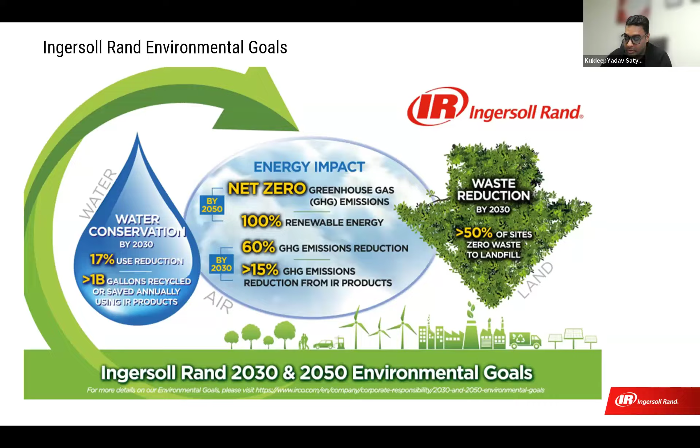The next slide is about our technology leadership, wherein we have marketed different kinds of equipment: compressors, blowers, vacuum pumps and systems, and single-use technology. We have a strong market position in technology innovation, global expertise, and a broad portfolio of products. We have a huge amount of equipment, with active patents around 88% with sustainability benefits, more than 2,300 engineers, and expertise in hardware, software, and controls. This is about our product portfolio and technology leadership.

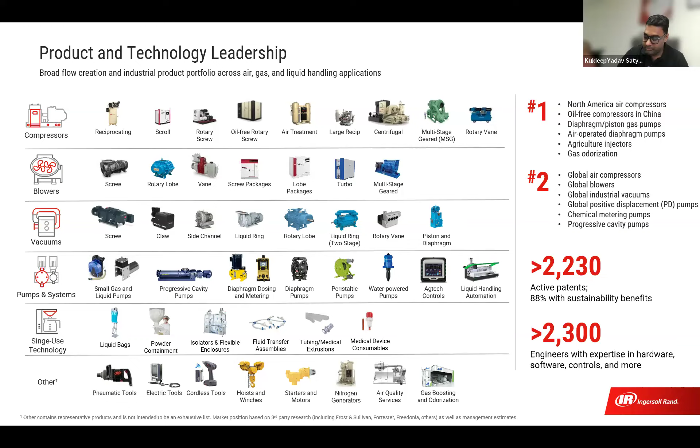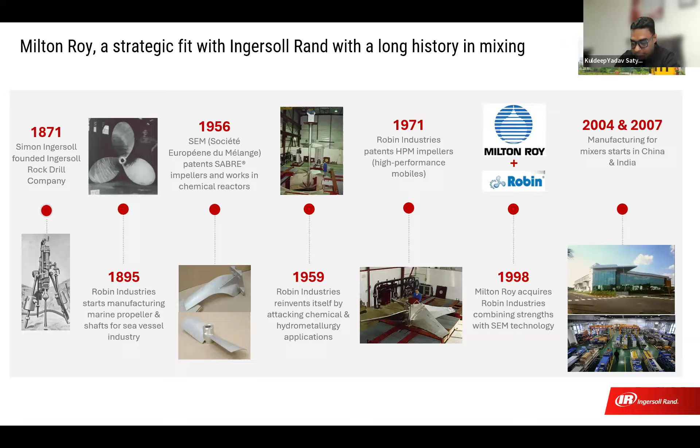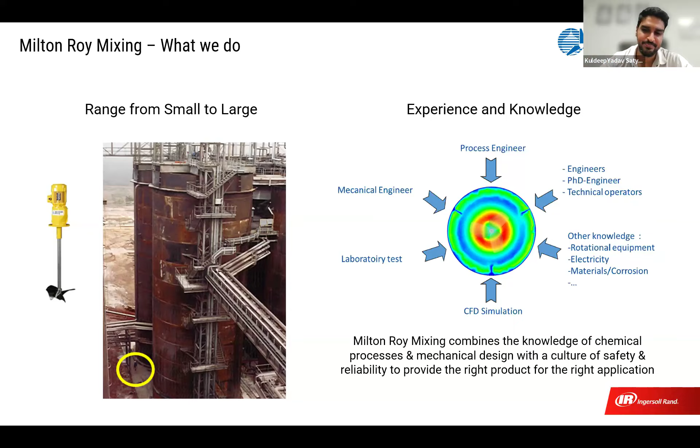So now we'll start about mixer - what is mixer, why mixing is required, what are the different types of mixers, where all it has to be used.

So this is what mixing is. This slide covers the basic definition of mixing. If you want to define it: mixing is a process to reduce the inhomogeneity in a process. Suppose a process is there, if you expect any inhomogeneity, it could be either temperature difference, density difference, or phase difference. So if you want to reduce inhomogeneity, you need mixing so that the process or the solution becomes homogeneous, or whatever fluids are inside the tank, it becomes homogeneous. So that is how we define mixing - it is defined as reduction of inhomogeneity to achieve the desired process result.

And inhomogeneity, as I explained, could be of different types - either density difference, temperature difference, or phase difference. This is what mixing is. And some of the examples of mixing are shown here.

Suppose you are mixing water with sugar syrup. Once you mix it, because of the density difference, sugar syrup will be settled at the bottom and water will be at the top, as you can see in image 3. Once you mix it, suppose with a spoon, it will become a homogeneous solution - sugar syrup will be blended in water. So this is an example of blending. Blending is when we are mixing two liquids that will not mix on their own due to density difference or some other difference.

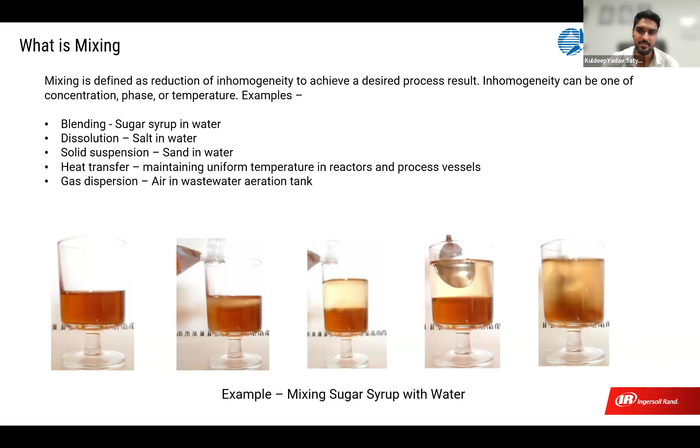So now we understood what mixing is. It's the process of reducing inhomogeneity, which could be of different things. So what is the purpose? Why do we mix? Why do we want to reduce inhomogeneity? This slide represents that with examples.

Suppose we want to mix ethanol with gasoline, like nowadays we get petrol mixed with ethanol. Due to density difference, it will not mix automatically. If you put those two liquids inside a tank, they will not mix on their own. So mixing will be required.

For solid suspension, as I said, suppose you have iron ore and want to pump it from one tank to another. If you don't mix it, the iron ore will settle at the tank bottom and water at the top, so you won't be able to pump it. In that case, you need to mix it.

So that is coming under solid suspension. It's not mixing, but the particles getting suspended, as shown in the last image at the bottom. Then there's dissolution, where solid particles mix inside the fluid to make a solution. For example, mixing sugar with water, or an industrial example like mixing polyelectrolyte powder with water, used in wastewater treatment. A solution is prepared and it remains a solution - it's not like if you stop mixing, the phases separate. Once the solution is prepared, it stays a solution. So that's dissolution.

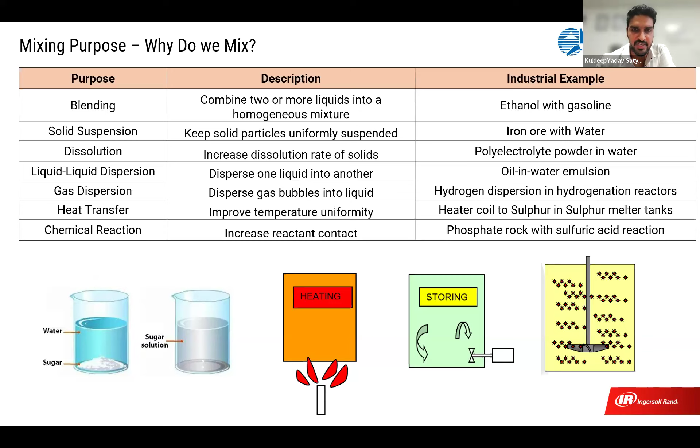So for this slide, suppose now you understand what mixing is and whether mixing is required for your process or not, you can figure that out. Next, suppose you want a mixer and approach an OEM like Milton Roy Mixing - what data is required for selecting the right mixer? That's covered in this slide.

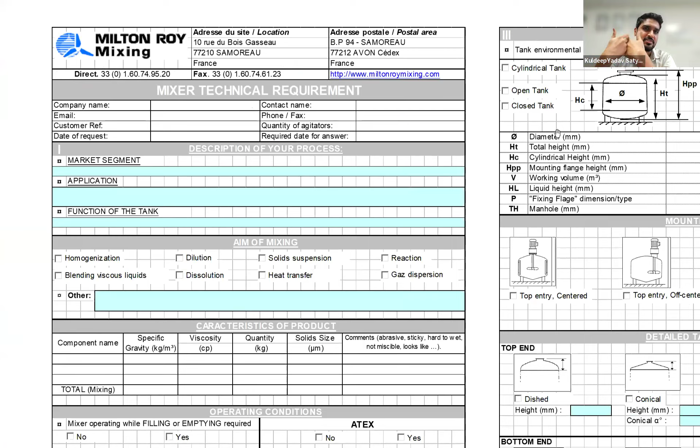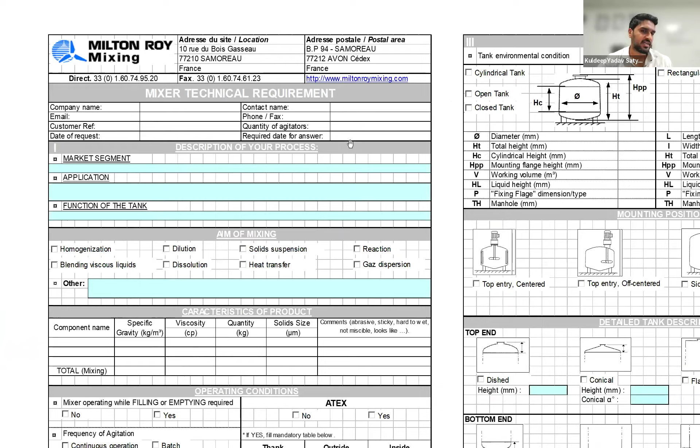We have this data collection sheet, which we send to the customer and ask them to fill it out. Based on that, we're able to select the right mixer. Let's quickly go through what's required for selecting the right mixer. First is application - which market it's going to, the function - whether it's blending, solid suspension, chemical reaction, or heat. Then we mention the aim of mixing - why you're looking for a mixer.

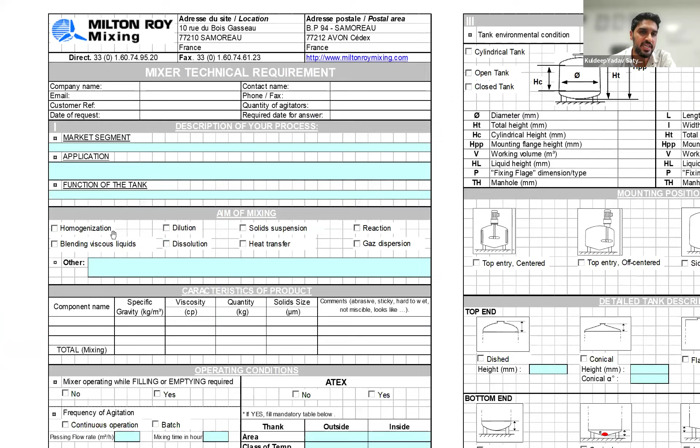And then we need the characteristic of the product. So suppose it could be only one product, like you have only one thing, but heating is taking place, so in that case it is one product.

Sometimes it could be two or three, like you are mixing phosphate rock, water, and sulfuric acid to make phosphoric acid. In this case you have to mention all the components inside the tank, and give the specific gravity, viscosity, and if it is solid particles, what is the size, and at what weight concentration you are mixing the different components. So that you have to mention here.

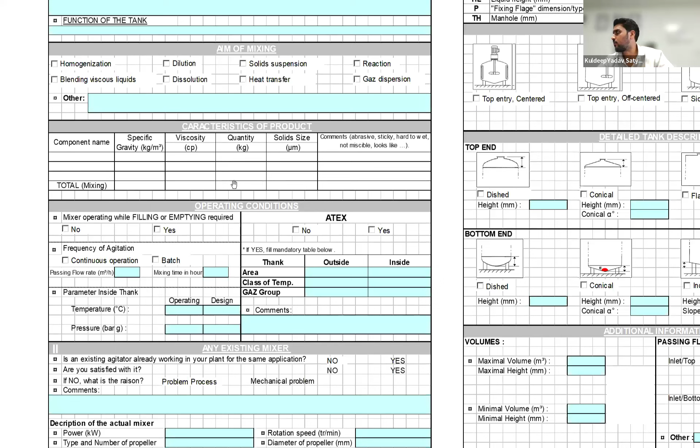And then whether you want to use the mixer while emptying and filling the tank, that is also important, because it impacts the mechanical design of the mixer. Also whether there's any hazardous area, the frequency, voltage available at site, and the temperature and pressure, if you have anything.

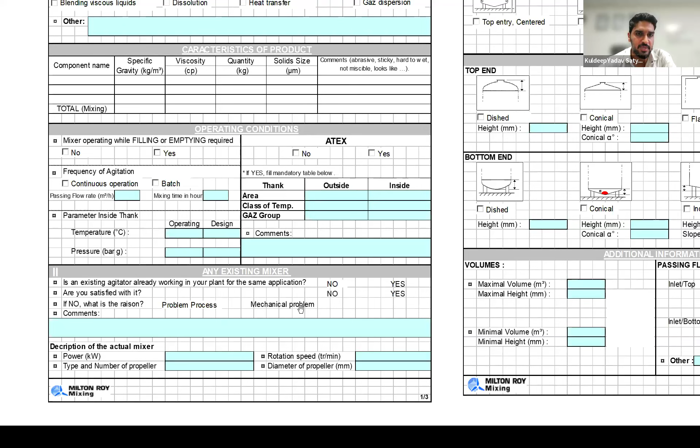And if you are using any existing mixer, you can mention here. If you are facing any problem with the existing mixer, that you can mention here.

Actually, this is the tank details. So what kind of tank, whether it is a cylindrical tank or a rectangular tank, that can be mentioned here. And what kind of mixer you are looking for. Mixers could be different types, like top entry, side entry, bottom entry with bottom bearing.

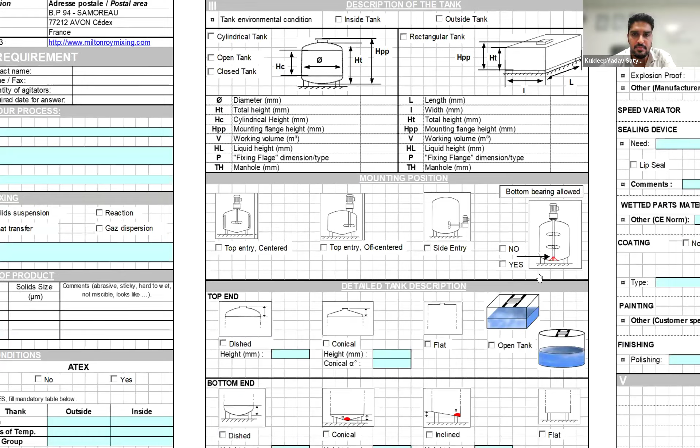These things I'll explain in coming slides. So what is the tank geometry, like what is the top end and bottom end of the tank? So we have asked for the details here.

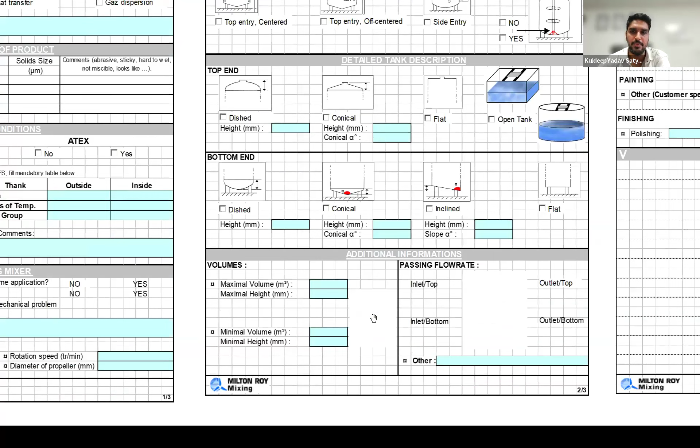And what is the maximum liquid level, minimum liquid level inside the tank? Where is the outlet and inlet position? So those things.

What kind of motor do you need? What efficiency, what voltage, what frequency, whether an explosion proof motor is required or not, that has to be filled here. Is it like a DOL start motor or a VFD motor? So that you have to mention here.

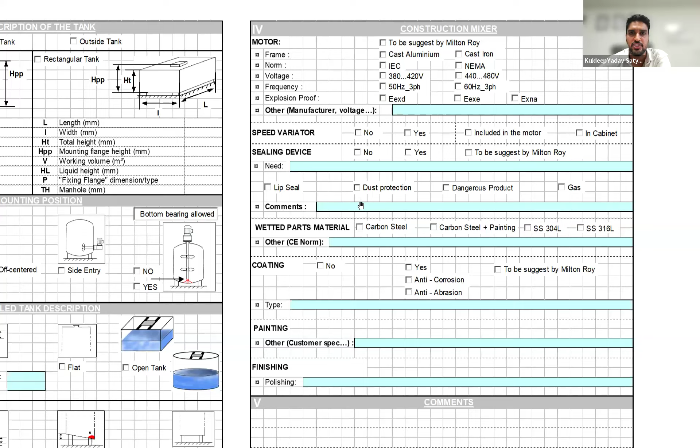So if you need any kind of sealing, that has to be mentioned here. It could be either lip seal or hydraulic seal or mechanical seal or any kind of seal.

What is the MOC you prefer for the wet end part, especially for the shaft and impeller? What is the MOC you are preferring? What about painting? Do you need any painting? If yes, what category? And finishing, like if there is any polishing requirement of the wet end components.

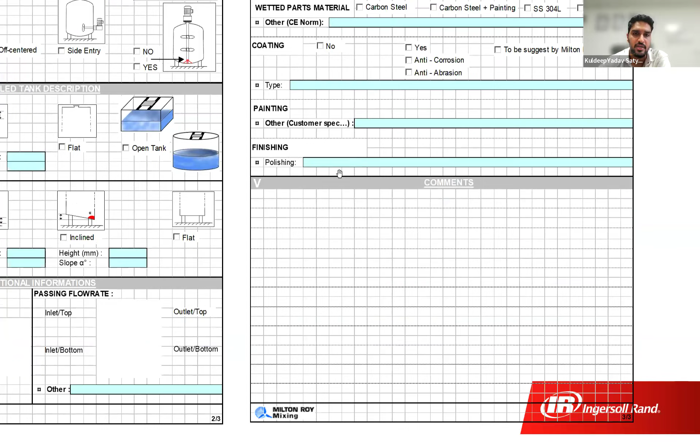So those details will be needed for selecting the right mixer. These are the details required so that we can offer you the right mixer for your application. And this is what we send to our customer to collect the details for selection of the proper mixer.

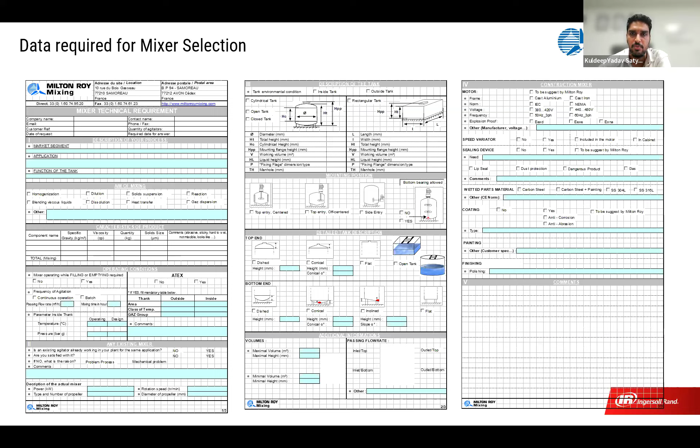Now we'll move to the different types of mixers we have. Type of mixers isn't just like, okay, these are the 3 types or these are the 4 types. Type of mixers can be defined based on different criteria.

One of the criteria is what kind of flow the mixer is generating, that could be one. How the mixer is fixed to the tank is another criteria. What kind of impellers we are using is another criteria. So here I have covered axial and radial flow mixers.

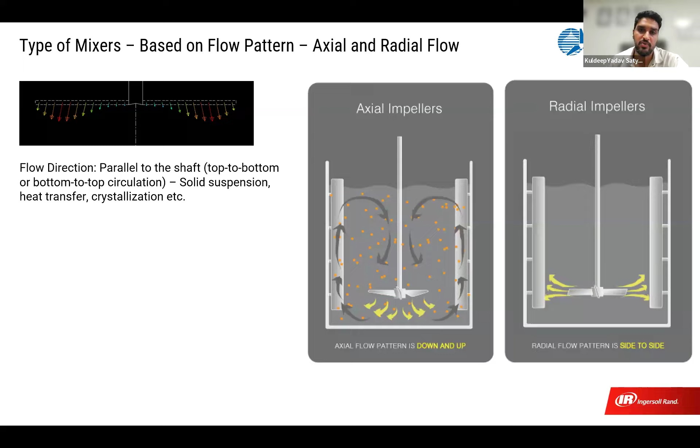For heat transfer, suppose you have a heating coil at the bottom of the tank, and you want to make sure the temperature of the slurry inside the tank is constant. In that case, axial flow impeller will be used. And for crystallization, where crystals have to be developed, axial flow impellers have to be used.

Then we have radial flow impeller. In that case, the flow is generated perpendicular to the shaft, and it comes out radially from the impeller, side to side. If you zoom out at the impeller, this will be the flow direction—radially outward from the impeller and perpendicular to the shaft.

It's used for emulsification—like mixing oil with water, where you have to shear the oil or water particles to make them small enough to remain suspended and form a solution. For gas dispersion, you have a gas disperser at the bottom of the impeller, and you want to break the gas particles into smaller particles so the contact area increases and the reaction being served by introducing the gas is achieved. So for high shear mixing applications like emulsification and gas dispersion, we use radial impellers.

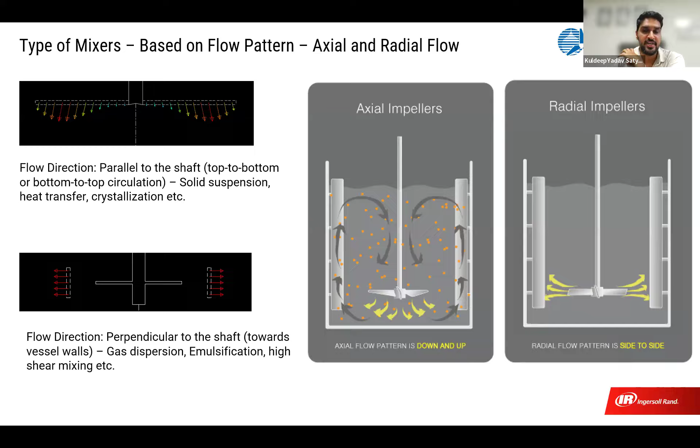So here we covered the type of impeller based on the flow pattern generated by the mixers. Now we cover the type of mixers based on the mixer mounting.

First is top entry mixer, which is mounted from the top of the tank, hence the name top entry mixer. Here we have shown an example of a top entry mixer used in coagulation application in wastewater treatment.

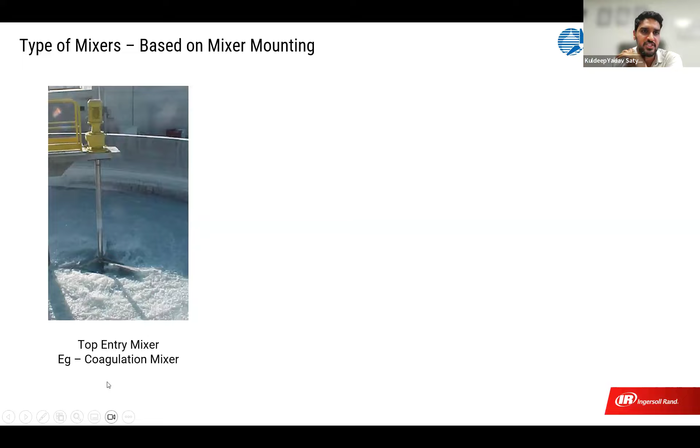Next is side entry mixer, mounted on the side of the tank. This is the tank, this is the circumference, the diameter of the tank, and it's mounted at the side—that's why it's called side entry mixer. This is one of our mixers installed in a crude oil storage tank application.

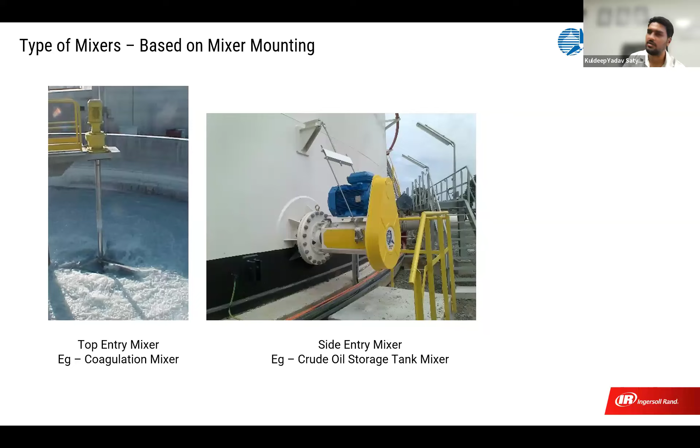It could also be a bottom entry mixer, introduced from the bottom of the tank. The tank will be coming here, this part will be mounted onto the tank nozzle, and the impeller will be inside the tank. Since it's introduced from the bottom, it's called bottom entry mixer. This is one of our mixers given for a PVC reactor tank.

So these are the different types of mixers based on mounting, as we classify them.

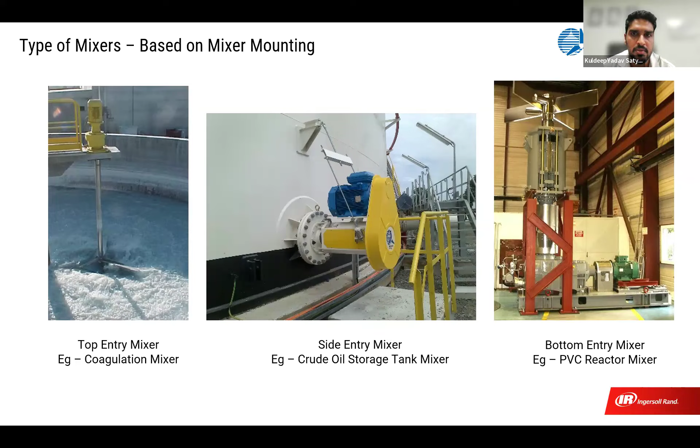Now we come to what are the mixer components—what will be the main components of the mixer? In this image we show the main components. These components have to be there for a mechanical mixer. Maybe not the gearbox—there could be a mixer without a gearbox, rotating at high speed based on the motor speed—but otherwise these components will be there for any mixer.

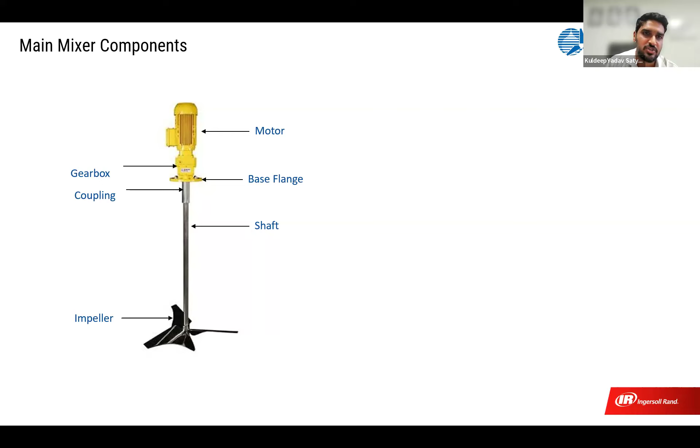We'll have a motor that converts electrical energy into mechanical energy and rotates the gearbox. Here we have the gearbox, which is required to achieve the required torque and output speed required for the mixer.

Then we have a base flange, provided matching your tank nozzle dimension, or if it's mounting on a structure, matching that structure's dimensions, to mount it on top of your tank. We give this base flange.

Then we'll have a coupling—it could be of different types—whose purpose is to connect the agitator shaft to the gearbox shaft. Then there will be the mixer shaft, and then the impeller. The impeller we call the heart of the mixer—it is what does all the mixing operation, converting mechanical energy into hydraulic energy required for the process.

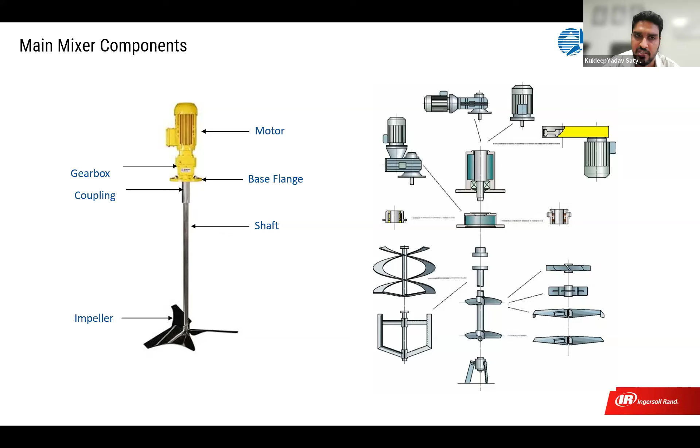So the agitator could be supported from the bottom or suspended type. Supported type will be required when the shaft length is very long, and we don't want all the radial load and bending load coming directly to the gearbox. In that case, we give support at the bottom also, which reduces the load acting onto the gearbox, plus it reduces the shaft size of the agitator - so we could go for a smaller size if we give support at the bottom. We give bottom support based on the dimensions of the shaft and the loads acting on the agitator.

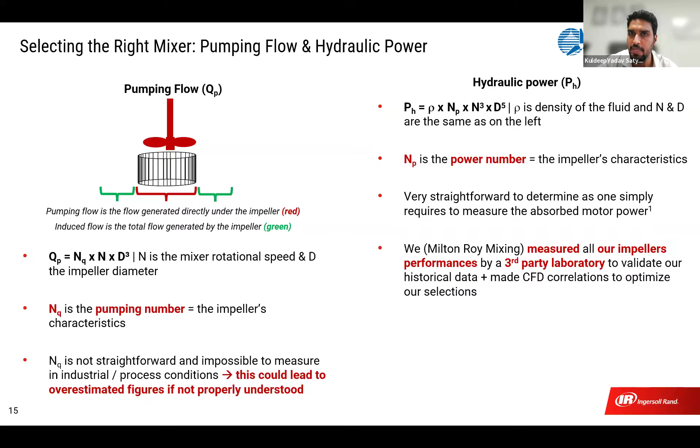So this is the formula used for hydraulic power calculation. So as you see here, rho is the density of the slurry, and NP is the power number. So for each impeller, it will have two dimensionless numbers, power number and flow number. That is defined by the geometry of the impeller. Based on experiments we have to do at our lab, we will come to know what is the power number and flow number of an impeller.

Then speed cube and diameter power 5. So this is the formula used for calculating the hydraulic power.

As I said, it's not very easy to calculate the power number and flow number of impellers. So for that, we work with different third-party laboratories, and we create miniature models of our impellers, and then we do experiments and calculate what is the right power number and flow number for a particular impeller. Plus, we do CFD analysis also. From there, we'll get to know what is the power number and flow number of an impeller.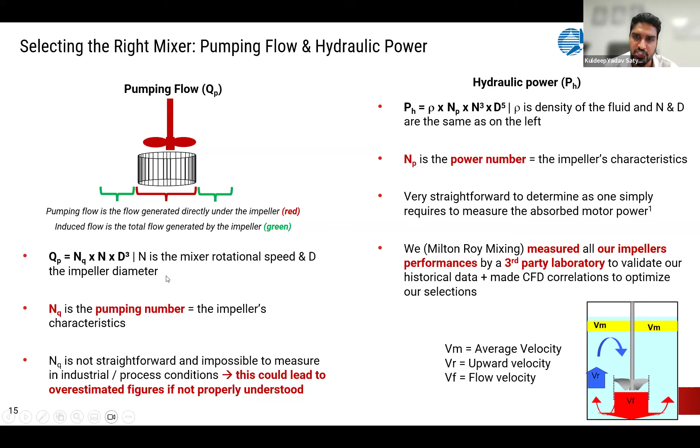So for selecting the right mixer, we need to decide three things only, for defining the hydraulic parameters of the mixers. So first thing is type of impeller, what kind of impeller we have to use. At Milton Roy Mixing, we have 40 plus impellers, different types. So we have to select the right mixer.

So once that is done, the power number and flow number will be defined, it will be fixed for that particular impeller. Then we have to select the impeller diameter and rotational speed. So once these three things are selected, we'll get the hydraulic performance of the mixer, like what will be the flow the mixer will be generated, what will be the velocity the mixer will be generated. So those kind of details we will get once we select these three parameters.

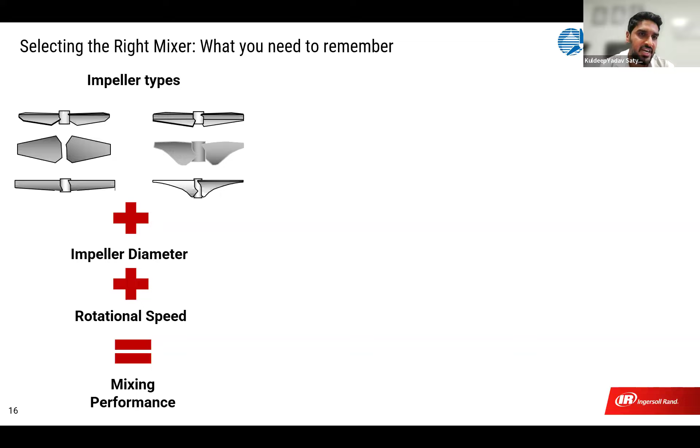So once we select these things, the impeller type, impeller diameter, and rotational speed, we can calculate the pumping flow and absorbed power of the mixer, and we can complete the hydraulic and mechanical design once we select these three parameters.

And here what we are emphasizing is, not always what customers generally think is like if the power is more of a particular mixer, the performance will be better, but that's not always the case. So the flow has to be correct for the performance to be better, and power varies based on the type of impeller, what diameter and speed we have selected. So not necessarily more power means the better mixer.

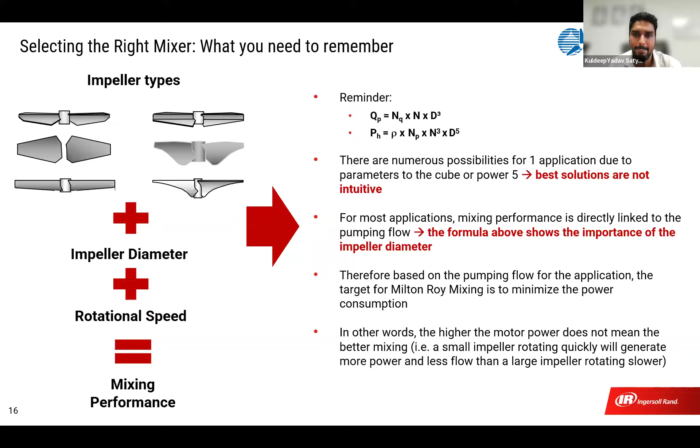The flow has to be calculated actually and compared whether the flow is enough or not, not related to the power. If flow is better, maybe the mixing will be better, but not like if power is better, the mixing will be better. That's not the case.

So here we have a very nice video to show different levels of mixing. Once we calculate the mixing velocity inside the tank, then we can calculate what's the level of mixing. So in this video, you will see at different mixing levels how the mixing will be looking inside the tank. This is just a video we have generated by experiments we have done in our lab. So I'll just play this video.

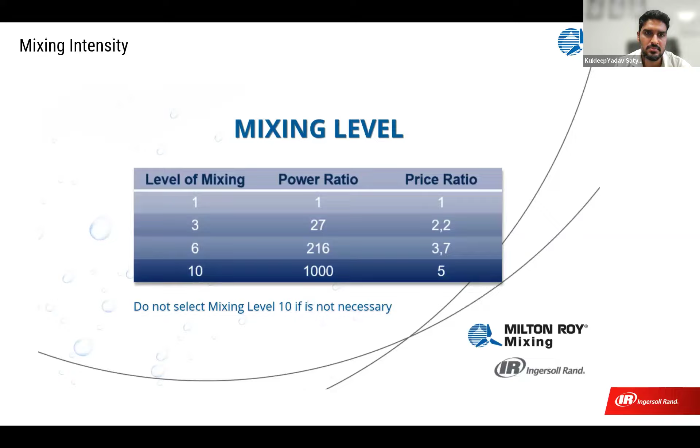Yeah, so just for this presentation, what I wanted to show is just a minute.

So here you have seen at different mixing intensity or mixing level, how the mixing will look inside the tank - a visual representation at different mixing intensities. So if you go from level 1 to level 10 of mixing, the power increases from 1 to 1000. So the level of mixing has increased by 10 times.

Yeah. So... just... yeah, so sorry.

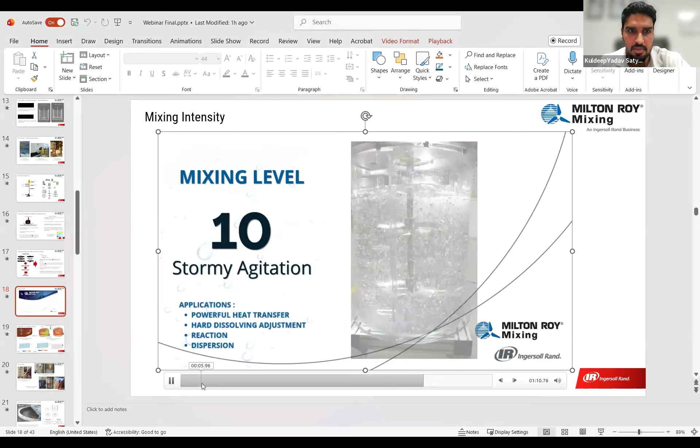So if you see here, the level of mixing has increased by 10 times, but the power has increased by 1000 times. So if your process doesn't require that intense mixing, you don't have to go for higher level or higher flow or higher power of mixer. We have to select the optimum mixing level that is required, and based on that, we can reduce the power, which helps in reducing the operating expenses.

And the price also, if you go from level 1 to level 10, the price increases by 5 times. So that's all - we have to select the right mixing level that is required. If we keep on increasing the mixing, maybe it's not required for the process, but you have to pay for the operating expenses and high cost of the mixer.

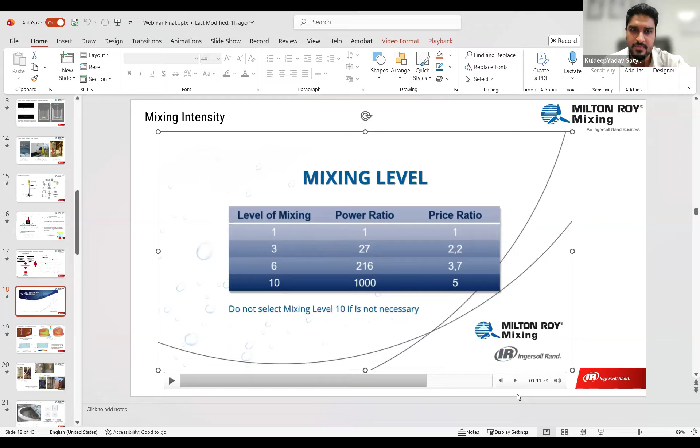Yeah, so here for this slide, we'll be explaining the importance of CFD for mixer selection and what we do for our customer when it comes to CFD.

So without CFD we can do analytical calculations, like what flow is generated, what velocity is generated inside the tank, what power is required. But to validate the analytical calculations, we do CFD also for our customers. And for complex applications, it is better to do CFD because based on different complex tank geometry, it's not possible to calculate analytically alone - like what will be the dead zones, what percentage of dead zones inside the tank. So for that, we do CFD analysis, and it is very helpful in that kind of application.

This is the CFD we have done for a sulfur melter tank with a top entry mixer. Here you see we can get the velocity contours inside the tank, so we come to know what is the velocity at different areas inside the tank and whether there are any dead zones or not. Dead zones are where the mixing is not adequate or the velocity is very low - we call that a dead zone.

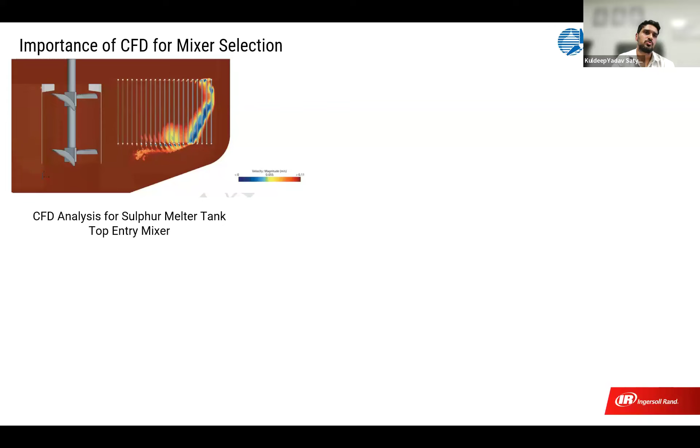In this application there was a heating coil that melts the solid sulfur to liquid sulfur. Based on the velocity, we come to know where the velocity is less, and where the velocity is less, the heat transfer will not be proper. So this kind of analysis we can do through CFD.

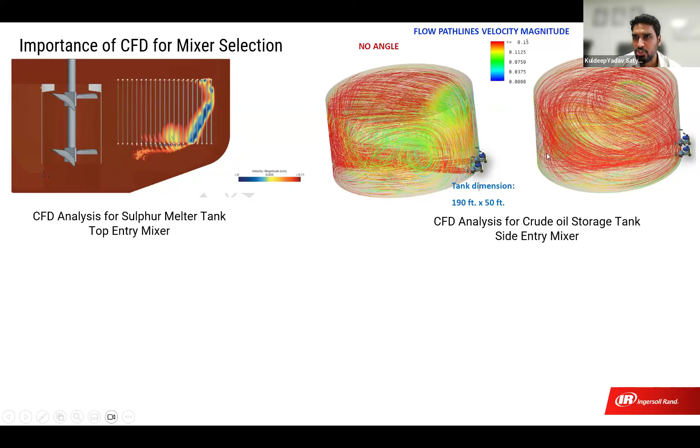So here you see the velocity streamlines. On the right side you see more red lines - the velocity in that case is more than 0.15 meter per second. And when mounted at 0-degree, you see more of the green area, so the velocity is between maybe 0.03 to 0.1 meter per second wherever you see green and yellowish area. So this kind of test - what is the best mounting position - we can also do through CFD analysis.

And then we have a very interesting analysis we have done here. This was a tank for a wastewater treatment application. The customer was asking, based on the tank geometry, for 3 mixers. But through CFD analysis, we showed the customer that 2 mixers give better performance compared to 3 mixers. That helped in reducing the capital expenditure, because they only had to buy 2 mixers instead of 3, plus reducing operating expenses, because they only pay power for 2 mixers and not 3, since we kept the power the same and only reduced the number of mixers.

I'll just play this video - it's a small animation.

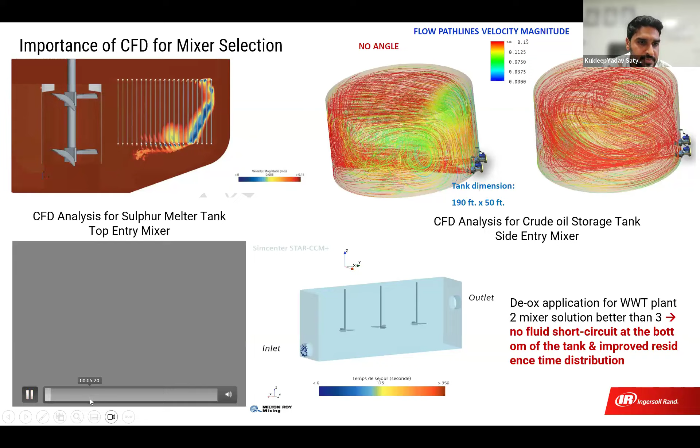Oh, it's not visible. Okay, maybe I'll come out of the slideshow and present this.

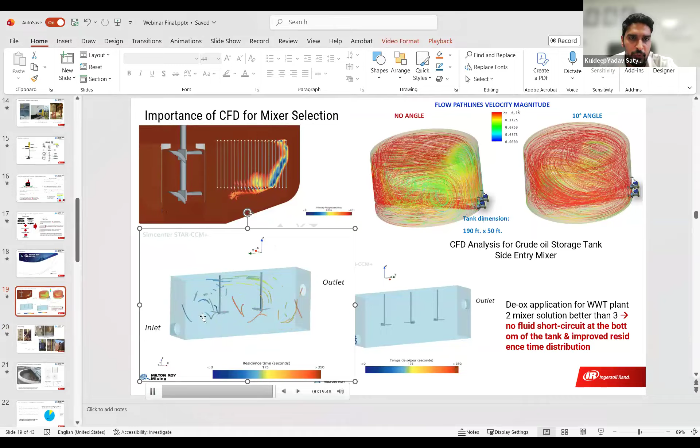So you see here 2 mixers. These are the flow lines generated. It goes through the first mixer and comes down, then goes to the second mixer. This is the residence time - more resident time means better performance, because the fluid is spending more time inside the tank and the mixing will be better. So you see the flow patterns, how it is generated. It goes through the first mixer and second mixer, and then it goes to the outlet.

But whereas if you come to the 3 mixer solution, like what the customer was asking - if you see here, there will be short circuit happening. I'll just play the video. So you see the flow patterns, it's coming from the bottom and going out. It's not going through all the mixers, because all the mixers are pushing the fluid at the bottom. So there is a short circuit happening, and in that case residence time will reduce for a few of the streamlines. For those, the mixing will not be proper, because the fluid is not spending enough time inside the tank, and it's going without going through the mixers. Without going through the mixer, the mixing efficiency is not good, and it's not mixing it properly. The mixer is not doing the operation properly, like that we can say.

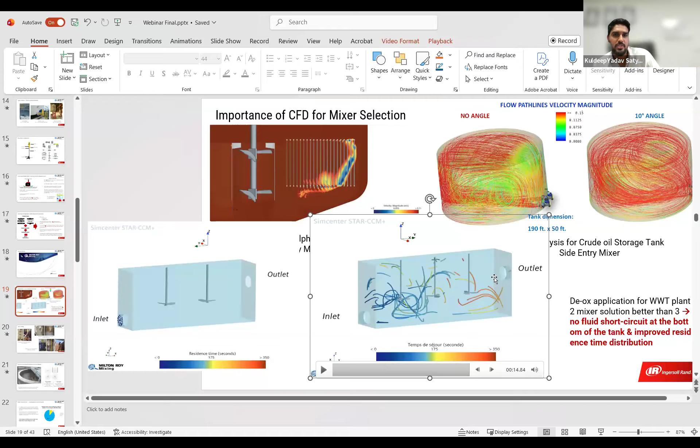Yeah, so here is what we do for pilot testing. As I mentioned, we do a scale down model before making the mixer for the actual tank. For a few applications, we do a scale down model and study in our lab how the mixer performs, what is the optimum flow required, what is the optimum power required, so that we do not give the customer more power than needed, and we give the optimum flow that is required. As I said, if you increase the flow, the power increases a lot, and then the operating expenditure for the customer will be high.

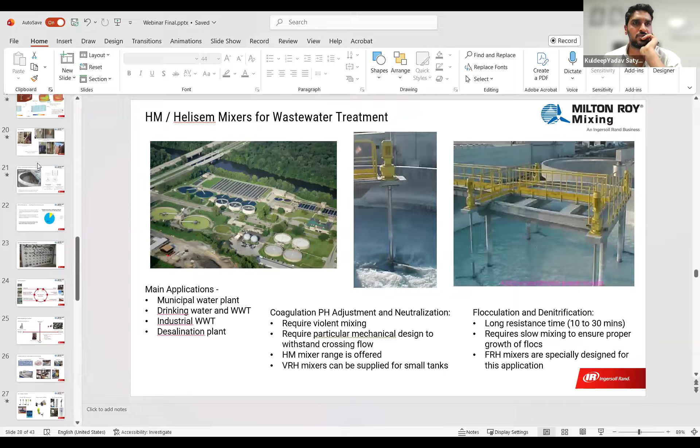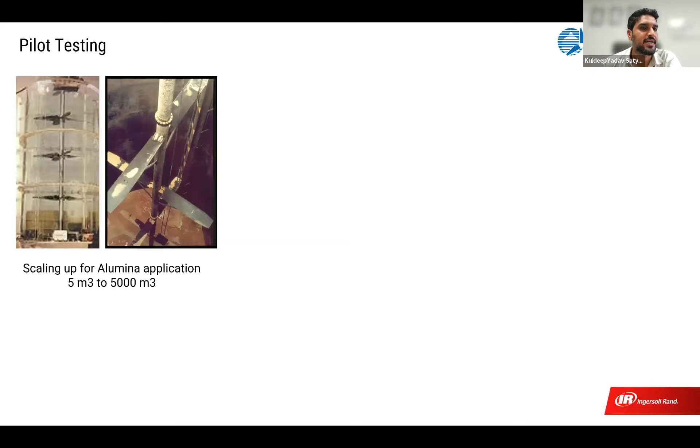Yeah, so these are a few of the tanks we have done for pilot testing in our lab. Some examples of that - this is for alumina precipitator. We made a 5-meter cube tank, and the actual tank was 5,000 meter cube. So we made the mixer small. For scaling down or scaling up, there are different criteria that we maintain - it could be mixing intensity, tip speed, or specific power in a few cases like phosphoric acid. We maintain those criteria while scaling up or down, so that when we scale up, the performance will be equivalent to what we tested in our lab. This is an example for alumina application, precipitator tank, where we did a scale down model of 5 meter cube and the actual tank was 5,000 meter cube.

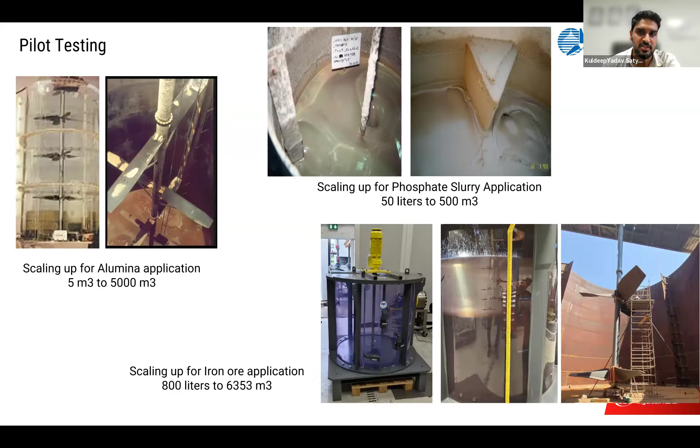This is again a scale down model we did in our lab for phosphate slurry application, where we made a scale down model of 50-liter tank and the actual tank was 500 meter cube. And this is again a tank we did for iron ore slurry application, where we did a tank of 800 liters and the actual tank was 6,353 meter cube for iron ore application. For all these applications, when we test at our laboratory, we test with actual slurry, so we know the exact performance of the mixer when it is installed at site.

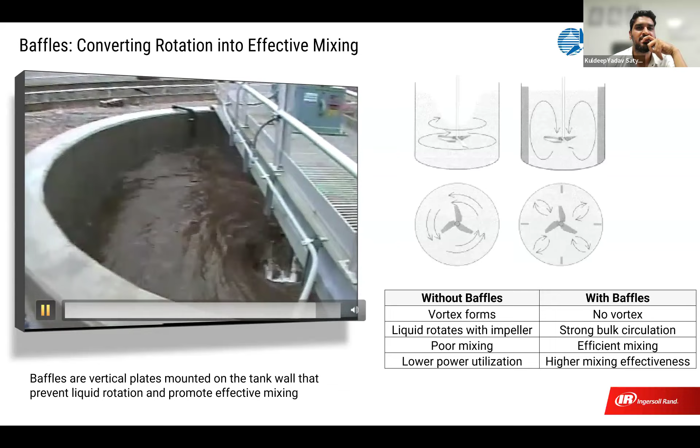Yeah, so you saw from the video, the baffles convert the agitation, so the energy will be transferred to the fluid from the mixer, but the motion will not be what we need for proper mixing. In this case, as you see, it was just swirling, rotating, but not effectively mixing.

So we ask the customer to put baffles inside the tank, so that the motion will be converted into the desired motion, so that the mixing will be proper. In this case, if there were any solid particles, they would be rotating at the bottom of the tank, not settling, and you will not get a homogeneous solution.

But we put baffles, vertical plates around the tank wall, so it will break the vortex, like you have seen forming here. It will break the vortex and give the required desired flow, up to down motion, so that the mixing will be proper. So here are the benefits, without baffles and with baffles.

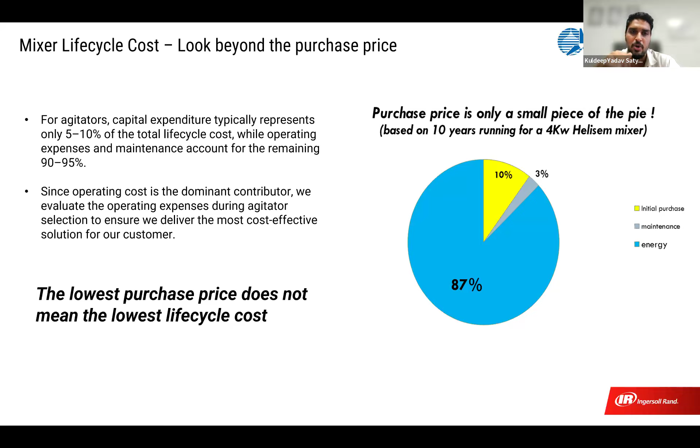That's what we also try to do, selecting the best mixer, not to increase the power, but to give the optimum flow and optimum power. The selection of the mixer is very critical, so that the initial capex will be low, and more important than capex, the opex will be low if the right mixer is selected and the operating power is low.

We do a lot of R&D, we are very strong in R&D. We keep on developing new mixers, new impellers, increasing the efficiency that gives high flow while consuming low power. We do a lot of experiments with third parties, a lot of CFDs, and we come up with new impellers that are very efficient and can give high flow while consuming less power.

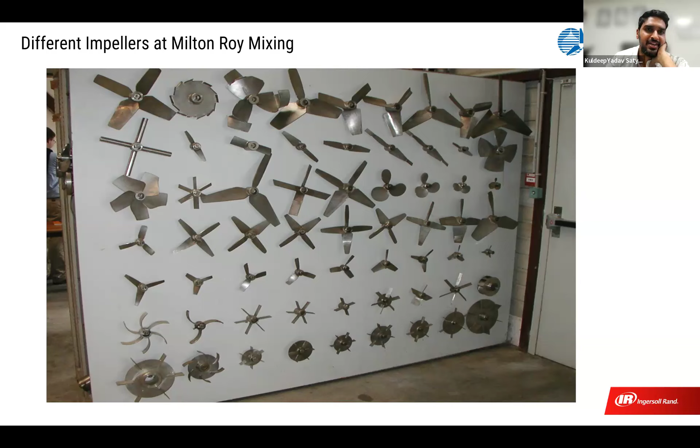It is fertilizers. We have a lot of installations and different customers for fertilizer application. And for mining, we are doing alumina application, iron ore application, cobalt and zinc application, we are giving our mixers.

For hydrocarbons, we are mainly giving side entry mixers for ethanol blending, crude oil storage, bitumen application. So we give our side entry mixers for those applications. In petrochemical industries, also in O2C industry, we give our mixers for PVC application and other chemical industries.

For wastewater treatment, we have a major presence. We give mixers for the entire wastewater treatment cycle, starting with neutralization, coagulation, flocculation, and pH adjuster tank. Different kinds of wastewater treatment applications we are giving our mixers for. And in general industries, other than these, a few industries we provide our mixers to as well.

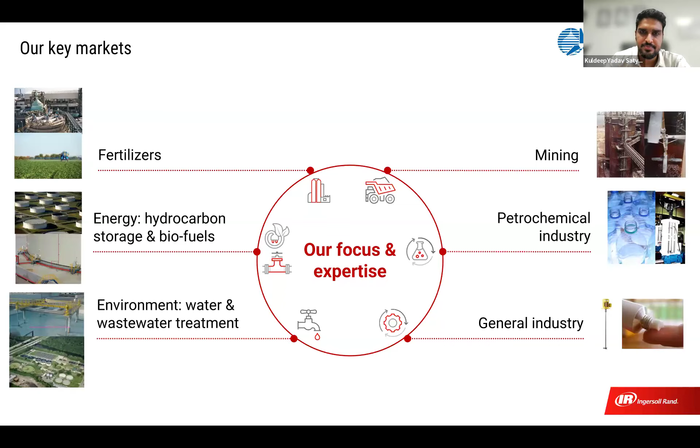This was for a fertilizer application installed in Jordan.

Maximum tank pressure we've given is 180 bar - mixers for a tank with 180 bar pressure. The maximum tank size for crude oil storage in China we've done is 210,000 cubic meters, with multiple side entry mixers installed on that tank. And the maximum shaft length we've given is 47 meters, in India for an alumina application, precipitator tank.

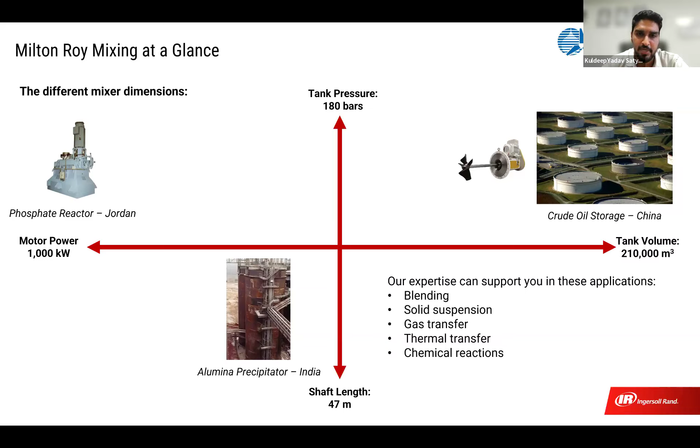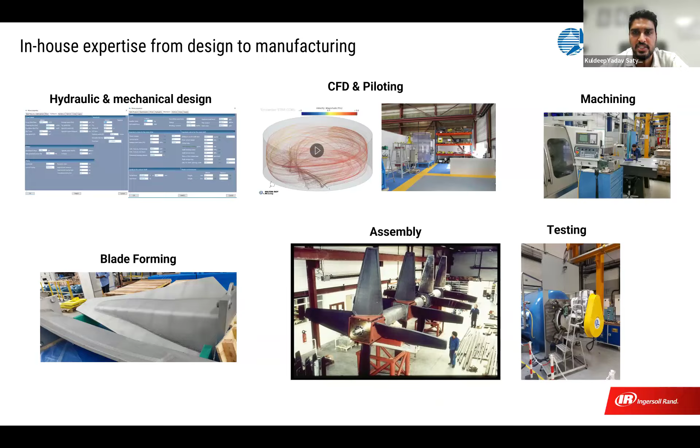We do machining of the components. For the blades, many are patented types, so we do forming, manufactured on special purpose machines - these are our own machines owned by Milton Roy. There we do forming of the blade wherever the impeller is very special. Then we do in-house assembly of the mixers, and we have a test setup where we test the mixers before dispatching to the customer.

Here we'll explain the different types of mixers we have. I'll hand over to Rishab to carry on from here.

Thank you so much, Kuldeep, for giving the in and out information on the technical parameters, technical aspects of the mixers and different applications, different impellers, different key markets where we are providing our mixing solutions. So we would move on to the slide.

Then we have engineered-to-order mixers, known as Robin mixers, having huge applications, huge shaft lengths, high power, usually for alumina, mining, and mineral processing industries.

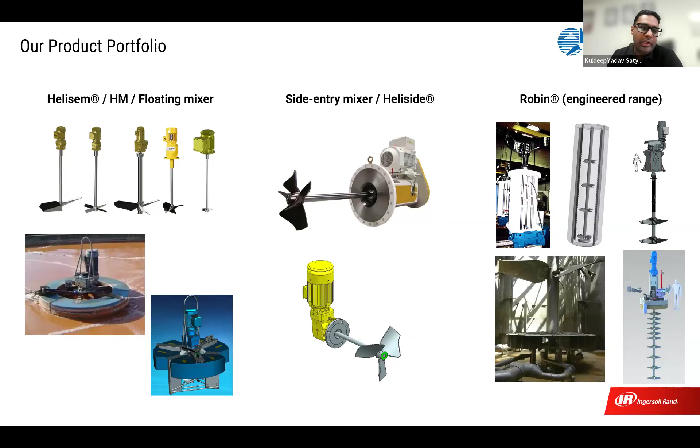My major focus is basically on the Helisem, HM mixers, and side entry mixers for oil and gas used for wastewater industries.

We'll talk about the HM and Helisem top entry, side entry mixers for wastewater treatment, wherein we have various applications into municipal water, drinking water, and wastewater treatment plants. We have applications for desalination plants, wherein we are supplying our mixers, providing better solutions using our HM and Helisem range of mixers.

We have applications for coagulation and flocculation. For coagulation, we need a very high level of mixing - high agitation is required, with violent mixing, you can say, to have better crossing flow. We are offering HM mixers and VRH mixers, wherein you have very little residence time for a flash mixing kind of application. Then we have flocculation and denitrification processes.

So for flocculation, after the coagulation process, when we input the polymer into the tank, the waste or the gunk will be attracted towards the polymer or the flocs, and the size of the flocs will increase. Based on this, we have to provide less or mild agitation, which is usually required in the flocculation process. So it will have a longer residence time, 10 to 30 minutes, and very slow or mild mixing is required.

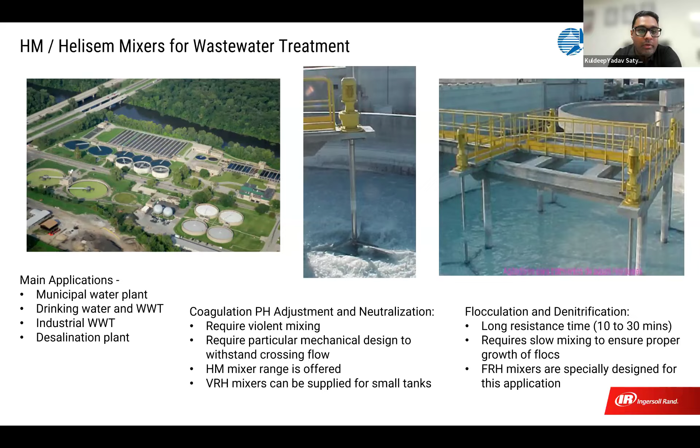In our Helisem range, we have FRH mixers, which are specifically designed for this application. We have side entry mixers, and as you can see, we have the range with two types: belt driven and gear driven. You can see in the photograph one installation. The kilowatt ratings we are offering range from 7.5 to 55 kilowatt, with fixed type and swivel type.

The tank size could be more than around 2 lakh meter cube, and we are providing a high efficiency 4-bladed hydrofoil impeller called Sabre, which is our patented design. The operating temperature will be around 250 degrees, and we provide that with a shut-off device arrangement.

So we are supplying the side entry mixers specifically for crude oil, bitumen, crude oil blending, gasoline, and fuel oil blending. These are the different applications wherein we are giving our mixing solutions to our customers.

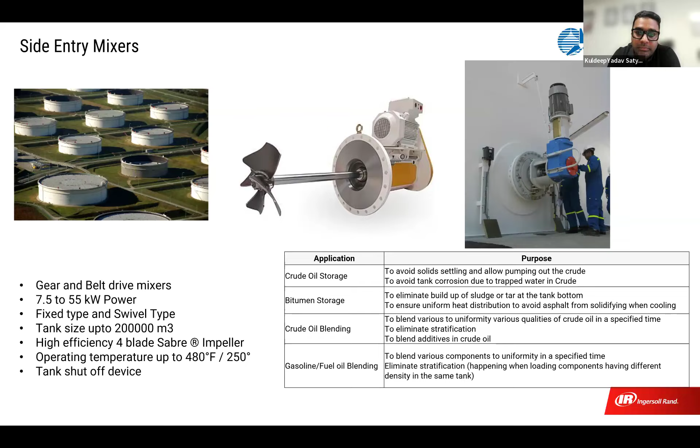So we have Milton Roy mixing solutions in the metal and mining industry. This belongs to the engineer-to-order mixers, or Robin mixers, wherein we are supplying for phosphoric acid, alumina refining, iron ore, and hydrometallurgical industry. Basically, mineral processing and mining industries are where we cater our mixers.

So first is phosphoric acid manufacturing. You can see high solids here, with 65% concentration, 1.65 density, and particle size around 2000 microns. The power will go up to 1 megawatt, where our application caters to solid suspension, homogenization, and heat transfer. This is the critical application we have done. We have supplied to IFFCO, OCP, Ma'aden, GFC, GIFCO, ICI, Polymex. These are our key customers we have served.

For alumina refining, the same goes for higher solid density and higher solid percentage. We have up to 132 kilowatt power rating, with solid suspension, heat transfer, and crystallization. This is particularly for the reaction in the digester reactor. We have served customers including Nalco, Hindalco, Ma'aden, and Pioneer. These are our key supplies where we have delivered our mixers.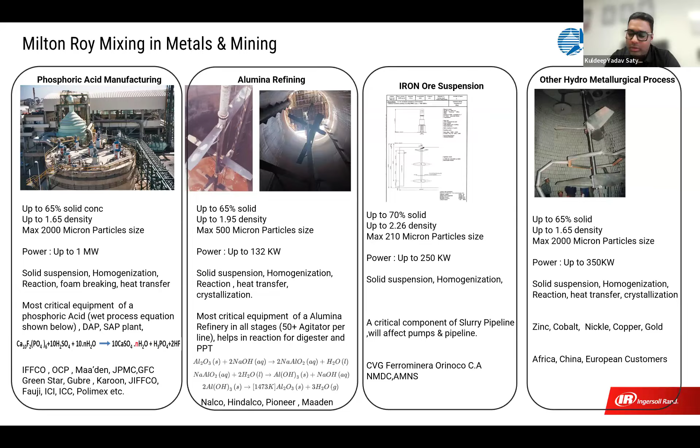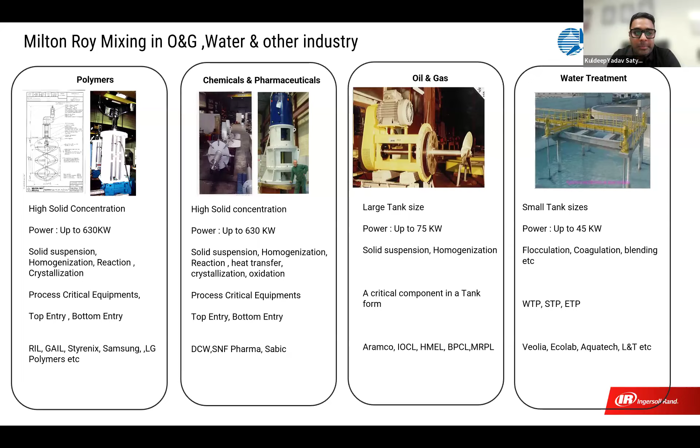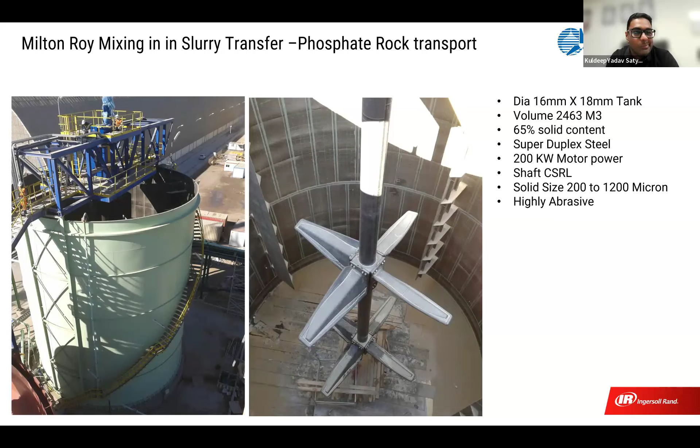So this is one of the supplies we have done for slurry transfer, for phosphate rock transport. You can see the dia and the height: 16-meter dia and 18-meter height, having a volume of approximately 2,500 meter cube with high solid content of 65%. The MOC is SDSS, and maximum kilowatt rating is 200 kilowatt. The shaft and impeller are in rubber lining with carbon steel. Solid particle size ranges from 200 to 1200 microns, and they are very, very abrasive. Depending on that, the MOC for impeller is chosen. So this is one of the supplies we have done in the past.